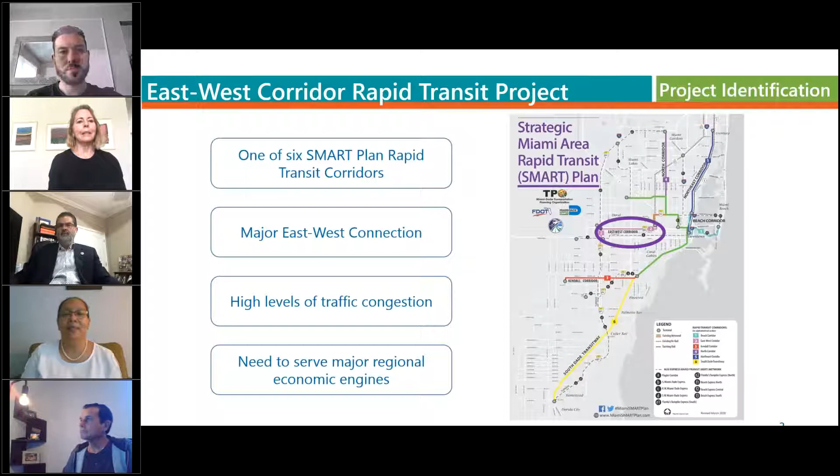Ivan, next slide. So a little bit about the corridor: it's about 14 miles long, including the portion we're evaluating along Northwest 7th Street — 10 miles on 836 from the Turnpike roughly to the Miami Intermodal Center and Lejeune Road, then 10 miles on the existing CSX line. In the figure at the bottom, the dotted box is where we're focusing our infrastructure improvements, proposing new stations and new alignments for HRT, commuter rail, or bus rapid transit, though transit operation could expand beyond that box. Within that box, the population is about 91,000 within a half-mile buffer, and 330,000 within a two-mile buffer, explained by Doral, a high-density area, along with Fontainebleau, Sweetwater, and other residential communities in the corridor.

The density is about 4,200 persons per square mile for population. Looking at employment, with the industrial developments, malls, the airport and ancillary facilities supporting the Miami Intermodal Center, employment in the corridor is about 109,000 within a half-mile buffer, and 215,000 within a two-mile buffer, with a density of 5,000 employees per square mile. So in short, you have a higher employment density than population density, but they're comparable. Daily traffic in the corridor is 150,000 to 190,000 on State Road 836 — that's a lot of vehicles per day — 45,000 on Northwest 12th Street, and 35,000 in the Blue Lagoon area on Northwest 7th Street. As for transit usage, the number of daily riders in the corridor is about 8,600, with a little less than half on Route 7. No route actually provides service on the 836 corridor itself, but there are routes that use part of 836 to connect various points, including Route 238, and the major intersecting Routes 37, 42, and 57, which together comprise the routes serving the corridor for about 8,600 riders per day.

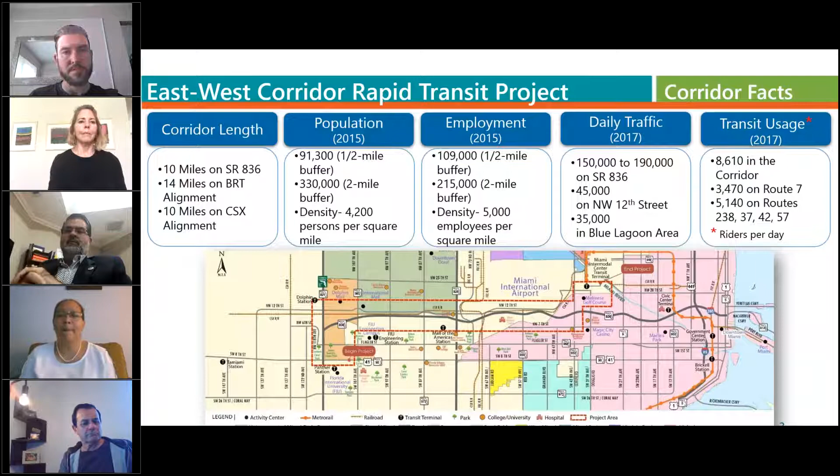So we talked about the congestion in the corridor, and I'm sure all of you did ride 836 at some point or another. This is a snapshot of the same day, Monday, March 9th, before all this happened. If you left at 6 a.m. from 147th Avenue at 8th Street, which is where the proposed Tamiami Transit Station will be constructed, heading to downtown Miami at Government Center: if you stayed on 836, your trip would be about 18 to 28 minutes. If you stayed on 8th Street and then hopped on 836, we're looking at 24 to 45 minutes. And if you did a roundabout way, staying on 836, then went on 112 and down to downtown, it's about 24 to 35 minutes.

Now that same route, two hours later at 8 a.m., same day, starting and ending at the same points: staying on 836, it would be an hour and 15 minutes compared to just 28 minutes at 6 a.m. Staying on 8th Street and then hopping on 836 would be an hour and 40 minutes, just an hour more than at 6 a.m. And staying on 836, hopping on 112 and down to downtown, would be an hour and 25 minutes. So in essence, 15 minutes to an hour more, just two hours later, using the same path and connecting the same points, which shows you the level of congestion in the corridor.

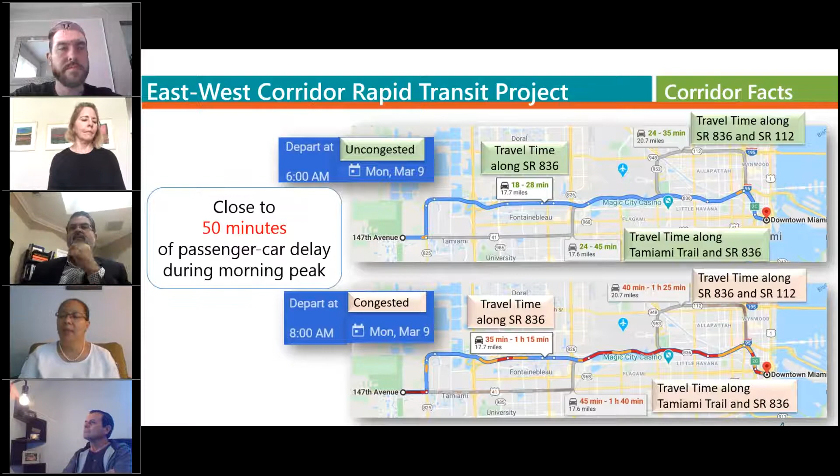So next, there's also the need to improve mobility in the corridor, which is the purpose of this study actually. It's just to provide for other modes of transportation in the corridor and be able to connect the various regional systems in the corridor, as well as the major activity centers.

So we're looking at three modes of transportation: the heavy rail, which is just an extension of Metrorail; a commuter rail, which would use the existing facilities, the CSX facility north of 836 along 12th Street, from the Miami Intermodal Center to the Dolphin Terminal; and a bus rapid transit with the main infrastructure between the Dolphin and the MIC, but with service expanding beyond that.

So this is in essence what we're looking at, the three modes. Starting with the purple line, which is the commuter rail transit alignment, it uses the existing rail tracks on the CSX. These tracks would need to be improved because CSX needs to operate freight in perpetuity on that line. And we would double track that line to provide the highest level of service if the commuter rail transit option is selected.

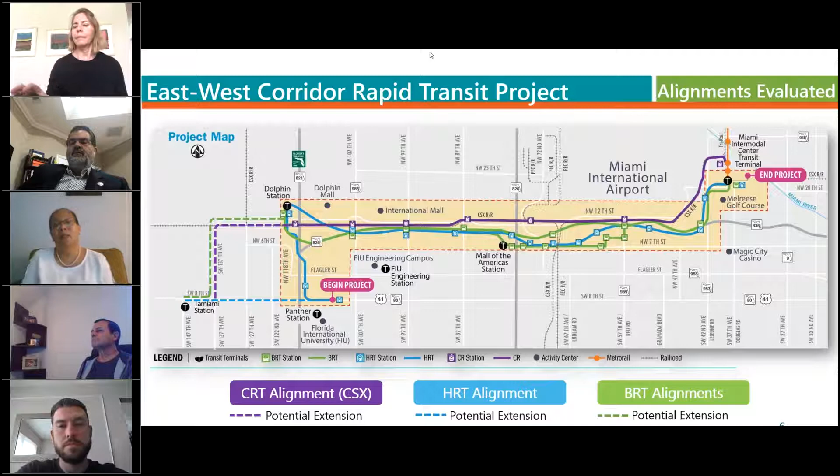If this alternative is selected, there are discussions to actually have a dedicated bus lane on 12th Street, 137, and 8th to connect the Tamiami station and the Dolphin station.

For all of the alternatives that we have evaluated, the 836 Express is our base condition. So for all of the alternatives, the three express routes that are planned are proposed to run on the inside shoulders of 836, which have been completed by MDX. All three lines are also included in all of the alternatives that we evaluated.

The first line, Express Line A, starts at Tamiami, runs on 8th Street, 137, the extension on 836, all the way down to the Government Center. Route B, the cyan line, starts at FIU, runs on the Turnpike, then hops on 836 to the MIC. The third line, Line C, starts at Dolphin Terminal, runs on 836, all the way down to the Government Center. Those three routes are point-to-point service, so you get on, for example, the pink line at Tamiami, and there are no stations in between until you get to Government Center. All three lines will be operating all day.

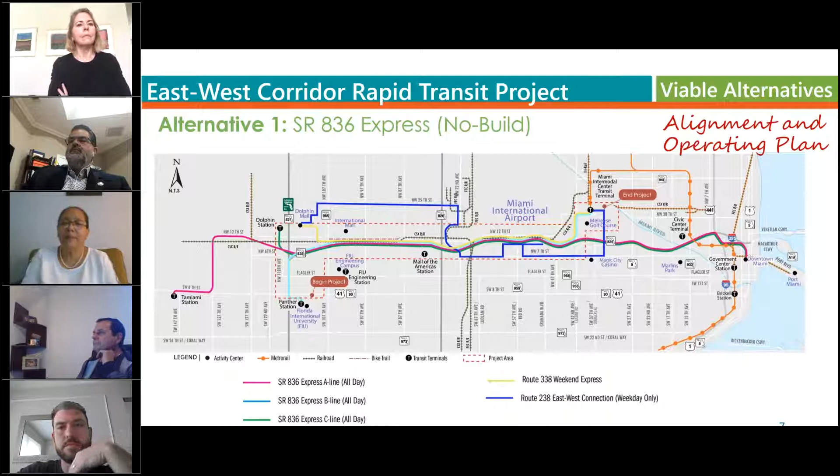All of the bus routes would be operating in the inside or outside shoulder of 836. No additional lane will be constructed. The outside shoulder of 836 will be improved, widened if necessary, to allow for bus operation. There will be some improvements to the 107th Avenue interchange to provide direct access to the proposed station there, but the movements and number of lanes that exist today would still remain.

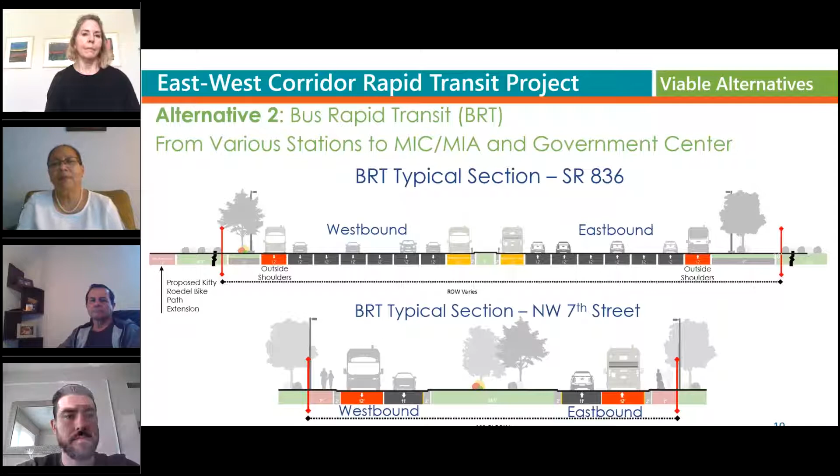The third alternative is heavy rail transit. The solid orange line is the existing Orange Line from Dadeland South to the MIC, and the dotted line is the proposed extension from the MIC all the way to FIU, with stations at approximately every interchange. In the next phase of the study, the location and need for those stations will be further evaluated if this alternative is selected.

The dash line to 147th and 8th Street is the proposed extension to be evaluated if this alternative is selected. This extension would allow someone to ride from FIU all the way to Dadeland South without changing trains.

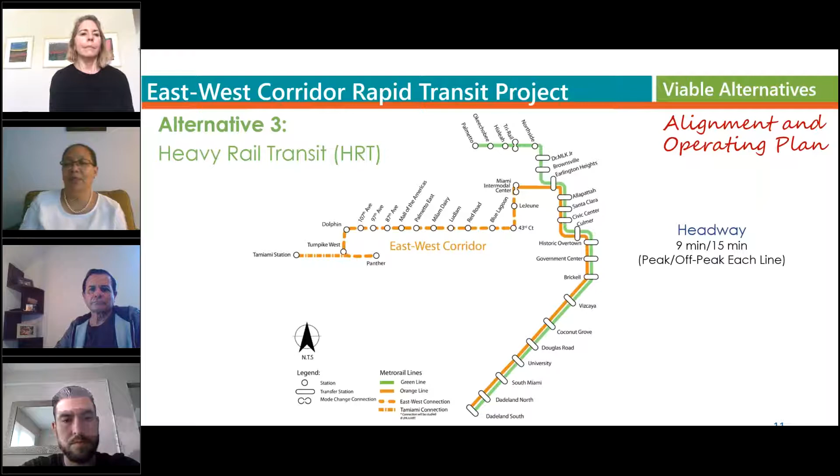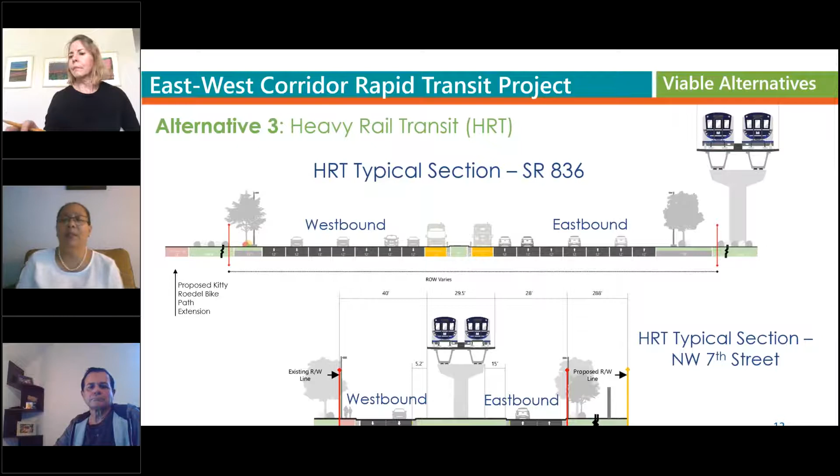This is a representation of the typical section with the HRT alternative. Again, the gold boxes in the middle are the inside shoulders, mainly used by the 836 Express service, and the Metro Rail heavy rail line, very similar to what you see down south on US 1, would be elevated mostly on the south side of 836. On Northwest 7th Street, the alignment would be in the median, and the existing two lanes in each direction would remain, so there wouldn't be any repurposing of lanes on Northwest 7th Street with the HRT alternative.

This is alternative 4, the commuter rail transit service, similar to Tri-Rail, running on the CSX line from the MIC to the Dolphin on the existing line, which would be improved and double-tracked to allow headways of 10 to 15 minutes. We have about six stations planned on the CSX line, pretty much at major interchanges, with the last one on the south side of 12th Street across from the Dolphin Terminal, and a pedestrian connection between the CSX station and the Dolphin Terminal.

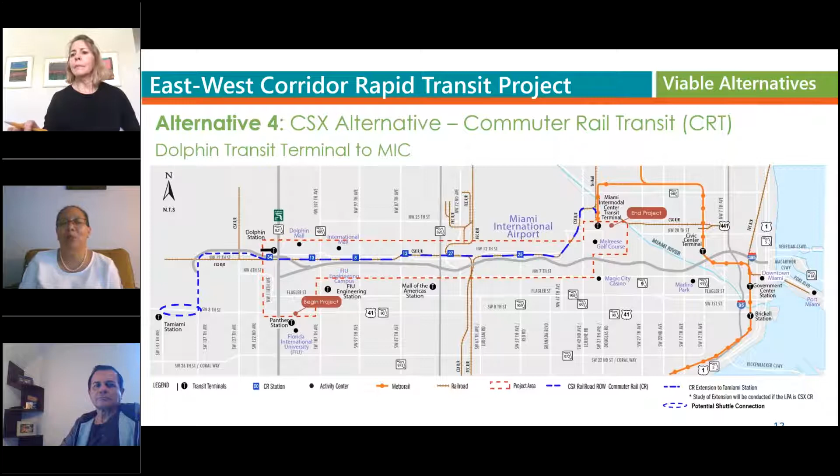The dash line is the proposed extension if this alternative is selected, and the oval shape from 137th to 147th Avenue on 8th Street is where the proposed shuttle, very similar to a Tri-Rail shuttle, would operate to connect to 147th.

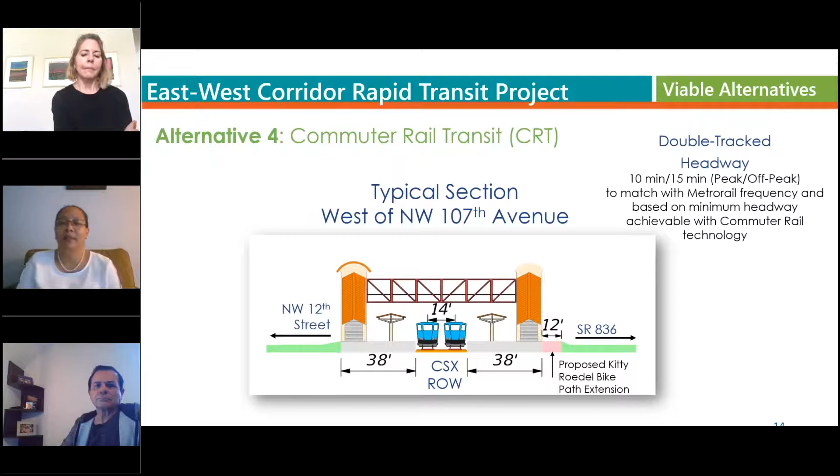This is a typical section west of 107th Avenue for the commuter rail. As you can see, that line would be double track, and a connection from the east to west side of the train would be provided via elevated walkways, very similar to what you see on the Tri-Rail line right now.

Next. All right, so alternative 5, a lot of you know this. Go back. A previous slide, there you go.

A lot of you know that this corridor, and I think Wilson mentioned it a couple of times, is bipolar. On the north side, you have a lot of industrial, commercial and malls. On the south side, you have a lot of residential, employment and hotels. So alternative 5 is developed to provide access to both sides of the corridor.

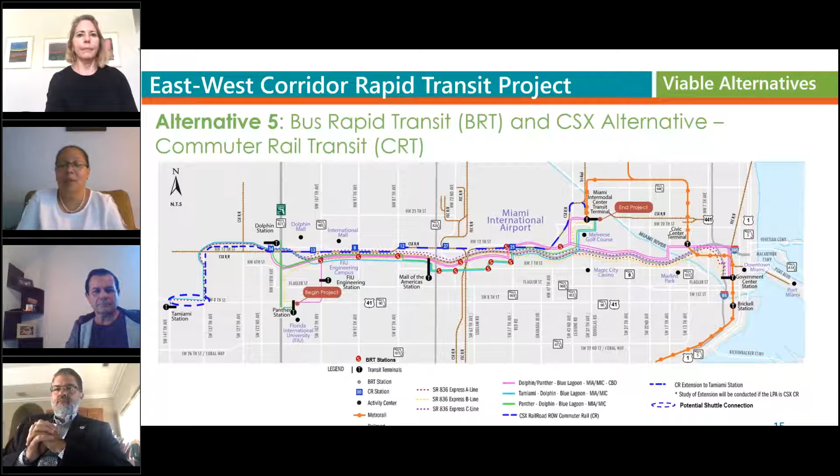Using the CSX alternative 4 that we described before, with the same location for the station and the same potential extension to the west, and then the BRT alternative 2, which would connect all of the dots and all of the land uses on the south side of the corridor, identical to alternative 2 described before.

Similar to the alignment, the operating plan would be exactly a combination of alternative 2, the BRT station -- you've seen this table before -- and also the CRT line, identical to what we have in alternative 4. One thing I didn't mention: with the HRT alternative, we're able to improve the Kitty Roedel path and actually extend it. That also occurs with the CSX alternative, which is a great opportunity to provide true multimodal connection in that corridor.

To identify the recommended alternative, we looked at three main criteria, and under each criteria we have a series of performance measures. We looked at cost and implementation timeframe, mobility, and social and physical impacts. We'll talk about each of them in the next slides.

We also used a ranking for each of the alternatives, going from lower performing 1 to higher performing 5. So if we look at cost, for example, an alternative with a higher cost would score a 1, and an alternative with a lower cost would rank a 5. But on the environmental side, or travel time, for example, a lower ridership would score a 1 and a higher ridership would score a 5. This was used to identify the recommended alternative.

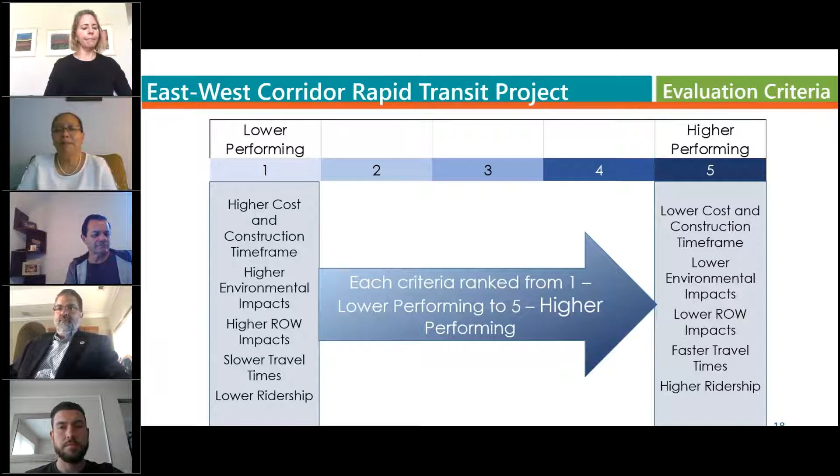So first we look at cost, just looking at a couple of the items on that table. First, the construction and capital cost. That includes the cost of the infrastructure, the cost of building the stations, the cost of the vehicles for each alternative, and double tracking for the commuter rail. What it does not include is the right-of-way cost, but we're able to evaluate the impact of right-of-way by the number of acres it would take to improve the roadways or include park-and-ride stations.

So the bus rapid transit comes in at 330 million, compared to the commuter rail at 505 million, followed by the commuter rail/BRT alternative at 835 million, which is the sum of alternative 2, the BRT, and alternative 4, the commuter rail, and then the heavy rail at 1.9 billion. The BRT is mostly improvements of the shoulders on 836, with improvements at some interchanges, where the heavy rail is elevated along the entire length with maybe some potential at-grade on Northwest 107th Avenue -- so a lot of bridges, lots of piers, and just a cost including the construction of the guideway.